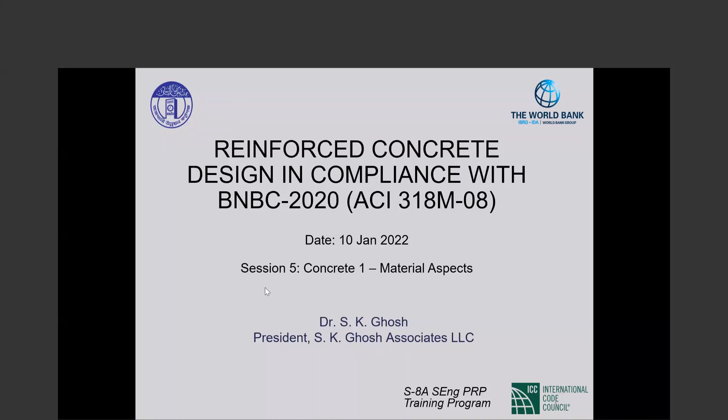Okay, good evening once again. It's 8:05, so let us start. Bodhi has already provided a bit of an introduction, so I'll just go forward. He has pointed out that the date is 11th of January, not 10th. We had to make some adjustments at the beginning of the program because of circumstances beyond our control. So today is the fifth offering in the series, and we are starting with our reinforced concrete courses. Today is a two-part course. I'll talk about the material aspects of concrete and then go on to strength design, the principles of strength design, what it is that we do when we do strength design of concrete.

The ingredients of concrete, as you all know, are cement, sand, stone, and water. Those are the basic ingredients. But for a long time now, we also have admixtures in concrete. Admixtures used to be classified as mineral admixtures and chemical admixtures. Mineral admixtures will be something like blast furnace slag or fly ash. Those are now called supplemental cementitious materials, and the chemical admixtures are called admixtures. Cement plus the supplemental cementitious materials are called just cementitious materials. So what used to be water to cement ratio today is water to cementitious materials ratio. However, the code that we are talking about, BNBC 2020, as pointed out earlier, is based on ACI 318-08. Back then, it was still water-cement ratio, and that is the terminology that you will see as we go forward.

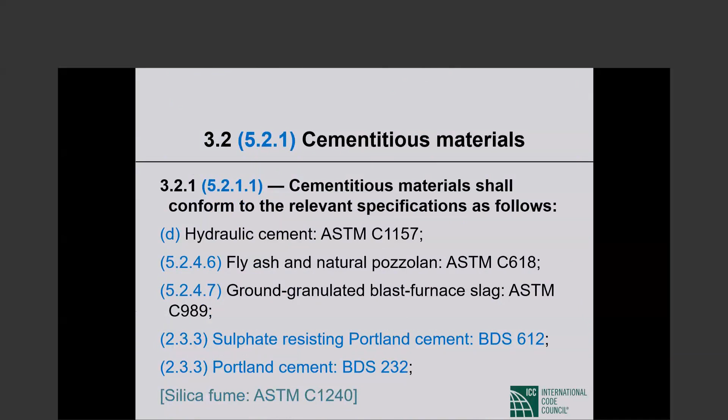So Portland cement, then blended hydraulic cement C595, hydraulic cement C1157, and the mineral admixtures, among which fly ash and natural pozzolans and ground granulated blast furnace slag - this is what we are dealing with for concrete making.

The BDS 197 cement comes theoretically in 5 varieties. CEM 1 is Portland cement, CEM 2 is Portland composite cement, CEM 3 blast furnace cement, CEM 4 pozzolanic cement, and CEM 5 composite cement, meaning cement and pozzolan together. Dr. Akif tells me that pretty much all cement used is CEM 1 and CEM 2. CEM 3 has been used in nuclear power plants, and 4 and 5 are basically not used.

C150 Portland cement is the American standard followed throughout the United States and in some parts of the world. C150 cement also comes in 5 types: type 1, 2, 3, 4, 5. Type 1 is normal, type 2 is moderate sulphate resistant - very important. If there is sulphate in the soil, you may want to go for type 2 cement. Type 3 is high early strength - I think the name tells you what it is.

Type 4 is low heat of hydration. As cement reacts chemically with water, there is heat generated, and that may cause problems depending upon what you are doing, how you are curing the concrete, and so forth. So in many applications like mass concrete, low heat of hydration may be an attraction. Then high sulfate resistance - when type 2 Portland cement doesn't do, you need type 5, cement with high sulfate resistance.

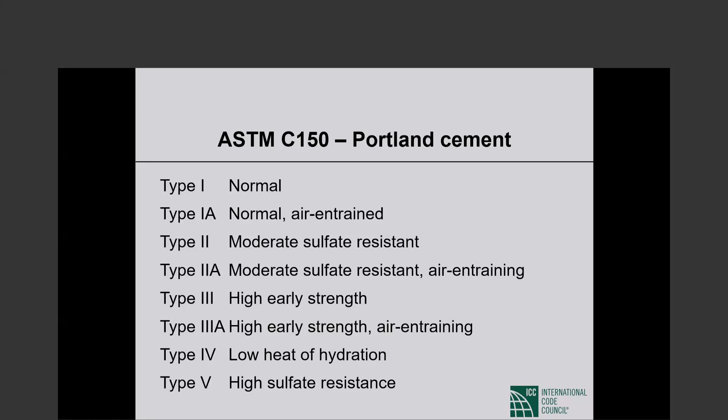For types 1, 2, and 3, there is air entrained cement. Entrainment of air in the cement is for freeze-thaw resistance. You do not have that problem in Bangladesh, but in much of the US, the entire northern part, concrete freezes and then thaws and then freezes again. That causes a lot of damage. To alleviate that damage, air is intentionally entrained in concrete. Typically this is done by adding air entraining admixtures to the concrete mix, but sometimes air is entrained in the cement itself at the cement plant, giving us type 1A, type 2A, and type 3A Portland cements. You don't have to worry about air entrainment to the best of my knowledge.

The blended cements C595: type 1S, which is Portland blast furnace slag cement, and 1P Portland pozzolan cement. If you have 1S parenthesis 50, that means the blended cement contains 50% slag by mass. And if it is a 1P cement, then within parentheses you may have A for air entraining, MS for moderate sulfate resistant, and so forth. So C595 blended cement is type 1S or 1P with additional information conveyed through the labeling.

1157 hydraulic cements, this is relatively new. C150 goes back a long way, then came 595, and then 1157 is relatively recent. This is also called performance spec, meaning the ingredients and so forth are not pinned down, but what properties the cement will deliver is emphasized. So hydraulic cement C1157 can be type GU general use, HE high early strength, MS moderate sulfate resistant, HS high sulfate resistant, MH moderate heat of hydration, LH low heat of hydration. So this kind of mirrors the varieties of C150 Portland cement that we have.

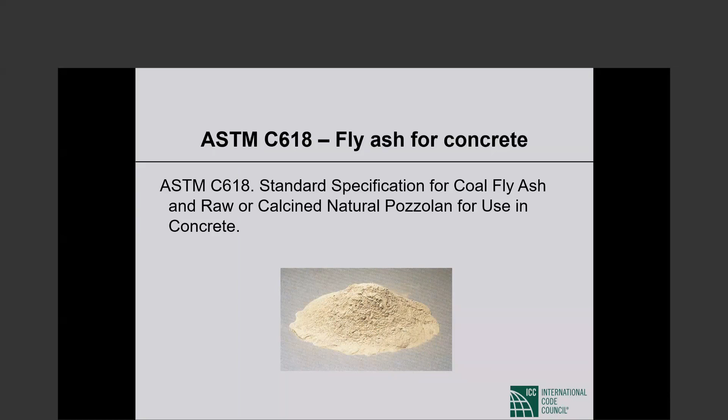Fly ash, probably the most common mineral admixture that is used in concrete. Fly ash gives the concrete a very dark color, but fly ash itself is not dark, as you see in the picture. The fly ash that you use must comply with ASTM C618, the spec for coal fly ash and raw or calcined natural pozzolan for use in concrete. So C618 for fly ash.

Ground granulated blast furnace slag, that again is a pretty popular mineral admixture or supplemental cementitious material. The applicable ASTM standard is C989, standard specification for slag cement for use in concrete and mortars.

Now, this is not citing a standard, and this is a reminder in all the slides. The section numbers in black are ACI 318-08 section numbers. The section numbers in blue are BNBC 2020 section numbers.

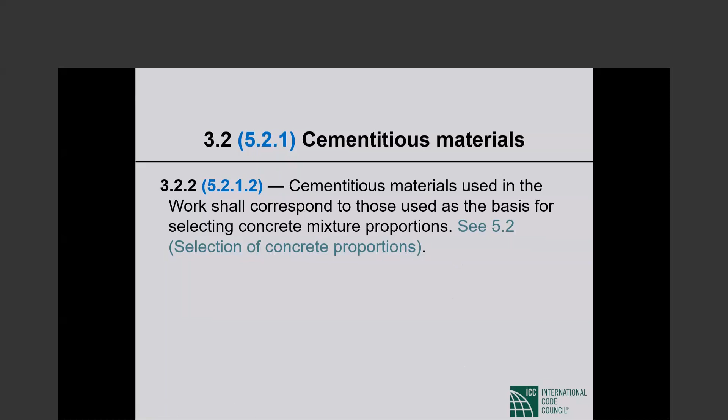Both documents tell you cementitious materials used in the work, meaning project, shall correspond to those used as the basis for selecting concrete mixture proportions. So you proportion your mix assuming that you are going to use certain supplemental cementitious materials. On the project, you have to use exactly those materials, not something close to those, etc. I think this is understandable upon reading, but this is very, very important. Whenever we have on the slide text in this color, that means it is ACI 318 text that does not appear in BNBC 2020.

We go from cement to aggregate. Concrete aggregate shall conform to one of the following specifications. BNBC 2020 says coarse and fine aggregate shall comply with BDS 243, coarse and fine aggregate from natural source for concrete. The US specification for normal weight aggregate is C33, and for lightweight aggregate it is C330. So C33 is normal weight aggregate, C330 is lightweight.

BNBC has an exception that reads aggregates that have been shown by special test or actual service to produce concrete of adequate strength and durability and approved by the building official do not have to comply with ASTM C330. In other words, you may use lightweight aggregate that is not in compliance with C330 if, as the exception says, it has been shown by special test or actual service to produce concrete of adequate strength and durability, and it has been approved by the building official.

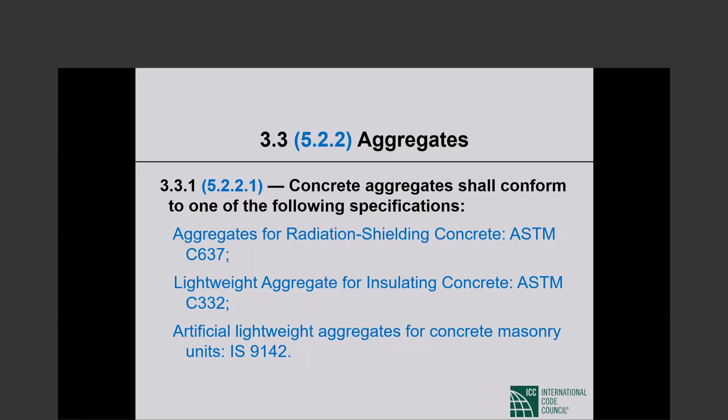I realize that this is not exciting stuff, but these things are important. All the ingredients of concrete have to comply with applicable standards and specifications.

The whole purpose of this is that concrete can be placed so that there will not be voids in the completed structural member. This is extremely important. If your stone pieces are too big, then voids may very well be created in the concrete because the concrete does not flow, it does not fill all the gaps that need to be filled. So 1/5 the narrowest dimension, etc. You can read this, this is extremely important. You cannot always use large aggregate, obviously.

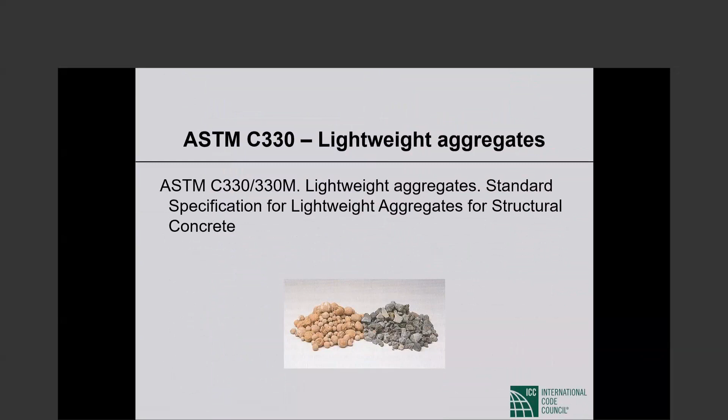C330 is the standard or specification for lightweight aggregate. The title is Standard Specification for Lightweight Aggregates for Structural Concrete.

Mixing water for concrete. Mixing water is more important than anyone would think. I would say it's extremely important that the water used in mixing concrete be non-problematic water, let me say.

We now have an ASTM C1602. It's relatively new, I haven't checked back, but I suspect that when ACI 318-08 came out, that specification was simply not available. So it is not cited in BNBC 2020.

So BNBC 2020 says mixing water for pre-stressed concrete, or for concrete that will contain aluminum embedments, includes that portion of mixing water contributed in the form of free moisture on aggregates. So free moisture on aggregates shall count as mixing water.

That is important. So mixing water shall not contain deleterious amounts of chloride ion, and how much is deleterious is given in both BNBC and ACI 318-08. For that, you have to go to section 5.5.3. Mixing water for pre-stressed concrete shall not contain deleterious amounts of chloride ion.

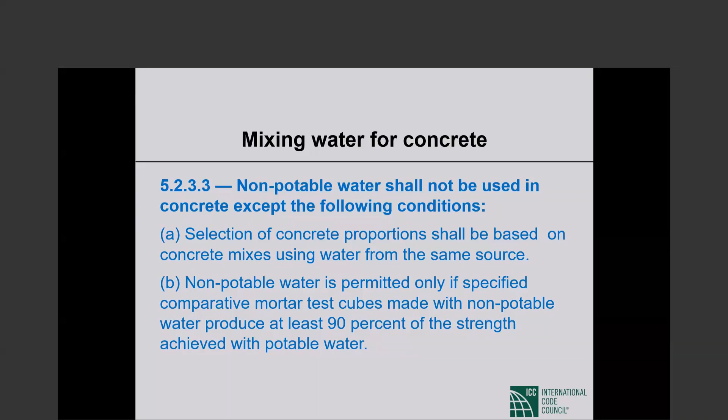Now, this is on this slide and I would emphasize it is extremely important. Item A is also important: selection of concrete proportion shall be based on concrete mixes using water from the same source.

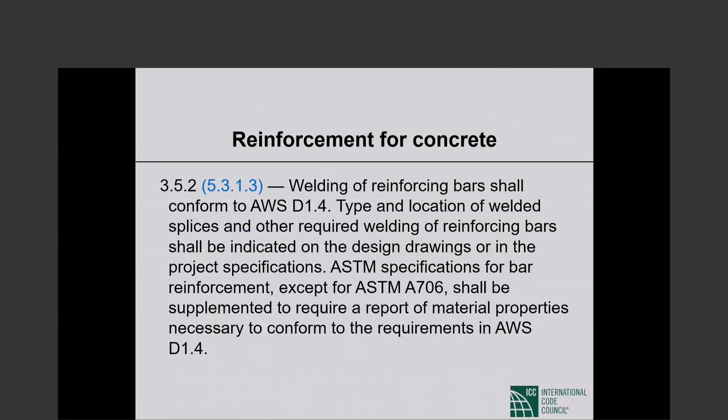Now we go on to reinforcement for concrete. The first item is not on reinforcement but welding of reinforcement. Welding of reinforcing bars shall conform to AWS, American Welding Society, D1.4. I'll let you read the rest, it gets a little too much.

Anyway, deformed reinforcement - that's what we always basically use. There used to be plain reinforcement a long time ago, but that has now been discontinued for quite a while, so all reinforcement is deformed reinforcement. The deformations are those ribs that you see on reinforcing bars. It is also called ribbed bars, the deformed bars.

So deformed reinforcing bars shall conform to the requirements for deformed bars in one of the following specifications. The specifications in Bangladesh are BDS 6935-1 and BDS 6935-2. -1 is plain bars, so those are not used. -2 are deformed bars, those are the ones used. So just as I remarked about cement, about reinforcement, basically all reinforcement used in Bangladesh, I understand, is BDS 6935-2.

Now in the US, the vast majority of reinforcement is ASTM A615, but particularly in seismic applications, and I would say increasingly, we have A706 reinforcement. The difference between the two: A706 is weldable reinforcement, A615 is not. A615 reinforcement requires special treatment if we are going to weld it. The ingredients of A706 are also tied down much more strictly than those of ASTM A615.

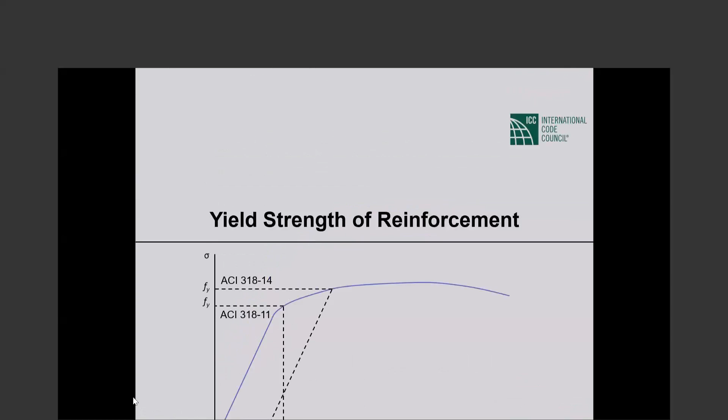So you take a strain of 0.0035 along the x-axis, and the corresponding stress is the yield strength. So when the yield strength exceeds 60 ksi, the yield strength shall be taken as the stress corresponding to a strain of 0.35%. This change of definition becomes important in certain applications and may come up in later discussions, but that is not the subject today.

However, I do want to point out that this change of definition is made. Yield strength means different things for reinforcing steel up to 60 ksi yield strength and reinforcing steel with yield strength larger than 60 ksi.

Then, in addition to bars, there are bar mats for concrete reinforcement. The applicable ASTM standard is A184. When I have M following the standard number, that simply means metric. Reinforcing bars used in bar mats shall conform to 615 or 706, the two US specs for reinforcement.

Now we go from bar to wire for reinforcement. Deformed wire for concrete reinforcement shall conform to A496. BNBC size shall not be smaller than size D4, which has a nominal diameter of 5.72 millimeters.

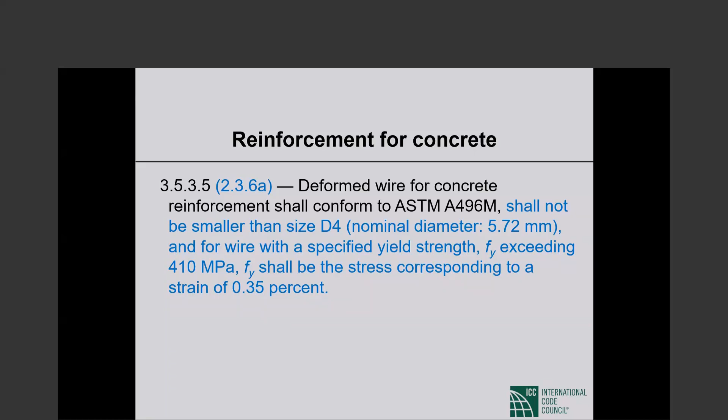Now, wire size - when we say D4, what does it mean? Individual wire size designations are based on the cross-sectional area of a given wire. M stands for metric, W represents plain wire, and D represents deformed wire. The number following the W and D represents the cross-sectional area of the wire in square millimeters.

So D4 means deformed wire having a cross-sectional area of 4 square millimeters. A D10 wire would indicate a deformed wire having a cross-sectional area of 10 square millimeters. Keep that in mind when you come across wire sizes.

Then there is what used to be called welded wire fabric. Now it is called welded wire reinforcement - people who manufacture these do not like the term fabric. Welded wire reinforcement may be made of plain wire or deformed wire.

Welded plain wire reinforcement shall conform to ASTM A185, except that for wire with high strength exceeding 60 ksi yield strength, the definition of yield strength changes. Welded intersections shall not be spaced further apart than 300 millimeters, 12 inches, in the direction of calculated stress, except for welded wire reinforcement used as stirrups. So there is a maximum spacing between the cross wires - no more than 12 inches.

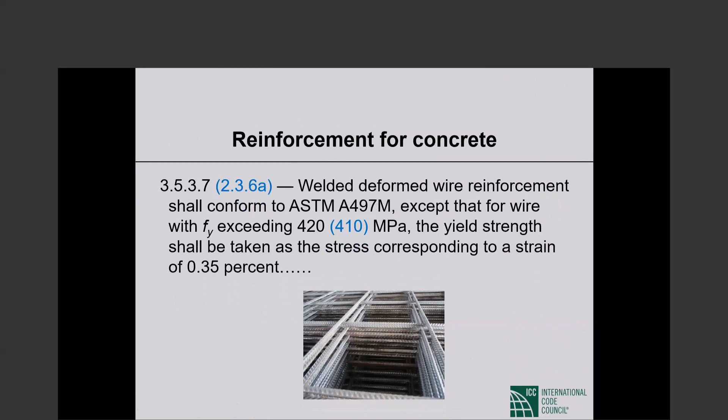Welded deformed wire reinforcement, the spec is A497. Again, the definition of yield strength changes when yield strength exceeds 60 ksi. Welded intersections shall not be spaced further apart than 400 millimeters. So if it is plain wire reinforcement, the cross wires cannot be further apart than 300 millimeters. For deformed wire, it is 400 millimeters.

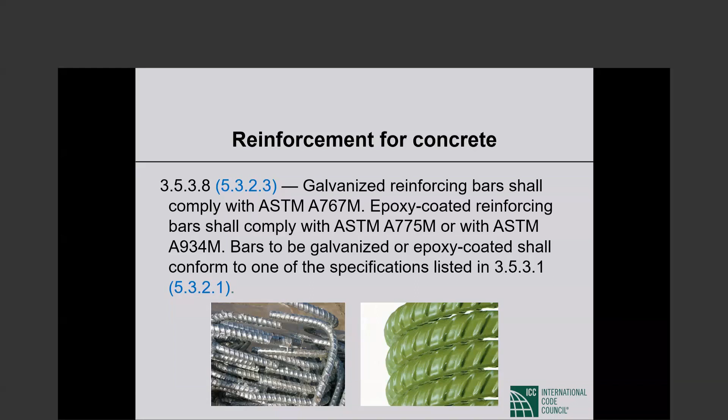Then there is galvanized reinforcing bars, A767. Galvanized means zinc coated, that is protection against corrosion, or epoxy coated reinforcement, A775. Epoxy coating, as I said, is very popular in highway construction for pavements, and in Bangladesh, apparently in coastal areas for basements and things because of the high risk of corrosion.

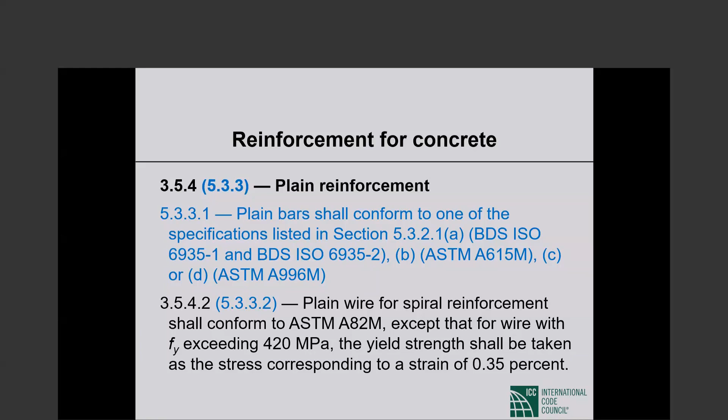Okay, so we come back to reinforcement for concrete, plain reinforcement. You know that it is 6935-1. That's the plain wire for spiral reinforcement shall conform to, so plain bars shall conform to 6935-1 as mentioned previously. Plain wire for spiral reinforcement shall conform to ASTM A82, except that for wire with F sub y exceeding - that definition of yield strength change repeats itself.

This is something I will mention because I consider it to be extremely important. At some point, I don't remember which module now, we will talk about flat plate design. Flat plate is a reinforced concrete slab supported directly on columns. There are no column line beams. Also, there is no local thickening of the slab on top of the columns - those thickenings are called drop panels. Further, there are no column capitals - the column tops are not flared to give us a larger column area at the top. So it is a slab supported directly on columns without any drop panels or column capitals.

In the design of that type of slab, the critical thing is punching shear, two-way shear as opposed to one-way shear, commonly referred to as punching shear. When punching shear stress is beyond the punching shear stress carrying capacity of the concrete, we use punching shear reinforcement, and the most popular kind are now headed studs.

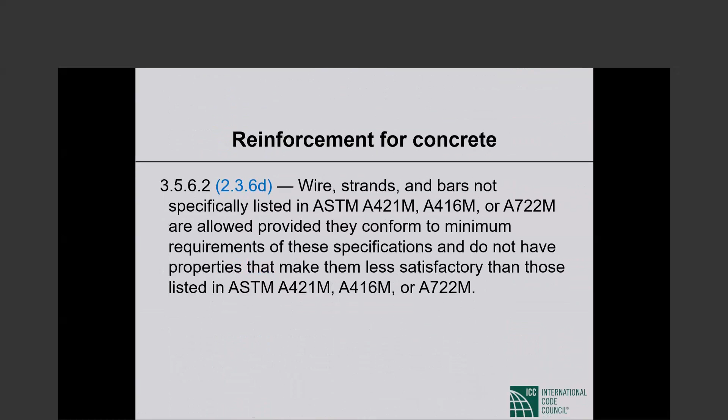Okay, then beyond reinforcing steel and pre-stressing steel, there are times when we use structural steel in concrete - steel pipes or tubing. And there are specifications given. I don't think I need to or want to take time over those. Those are not common applications, but there are times when you do use structural steel pipe and tubing in concrete. If you do, there are ASTM specs governing their use.

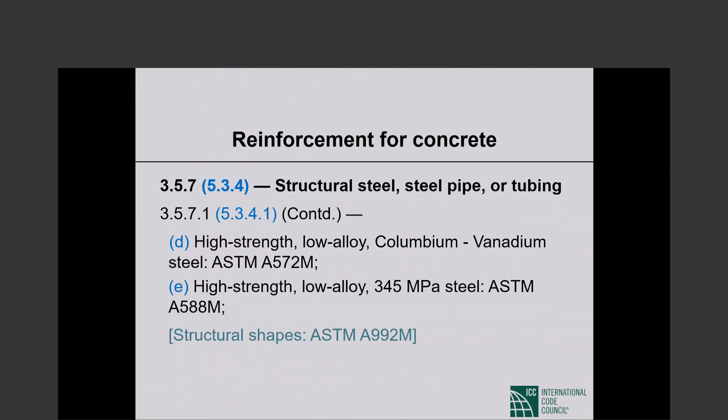Continuing with structural steel pipe or tubing - again, I don't think that I want to spend time on those items, you can look them up. I do want to spend a minute or so, as I did on the headed stud shear reinforcement. The color indicates to you that this is in ACI 318-08, not in BNBC 2020.

Steel discontinuous fiber reinforcement for concrete is recognized in ACI 318 as shear reinforcement under very tight controls. This is an increasingly important item that you should be aware of. Other types of fibers, like carbon fibers, are not recognized by 318.

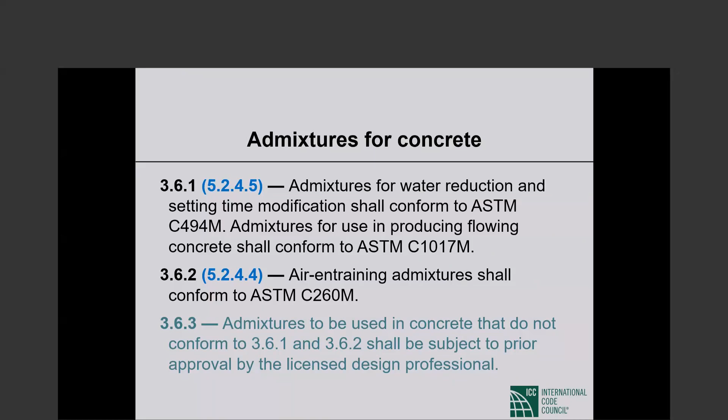Admixtures to be used in concrete shall be subject to prior approval. ACI doesn't require this, but BNBC does—admixtures must be subject to prior approval by the building official and conform to the following standards: BDS EN 934-1 or BDS EN 934-2.

Fly ash or other pozzolans are not called admixtures today—it's mineral admixture now, or supplemental cementitious material. The spec is C618. Ground granulated blast furnace slag is also cementitious material, ASTM C989. Pigment for colored concrete is C979. BNBC cites those under admixtures for concrete.

Calcium chloride for admixtures containing chloride from sources other than impurities in admixture ingredients shall not be used in prestressed concrete, in concrete containing embedded aluminum, or in concrete cast against stay-in-place galvanized steel forms. This is extremely important. Wherever you have potential corrosion, any situation where you need to ensure there will be no corrosion problem, you have to avoid calcium chloride in your admixtures.

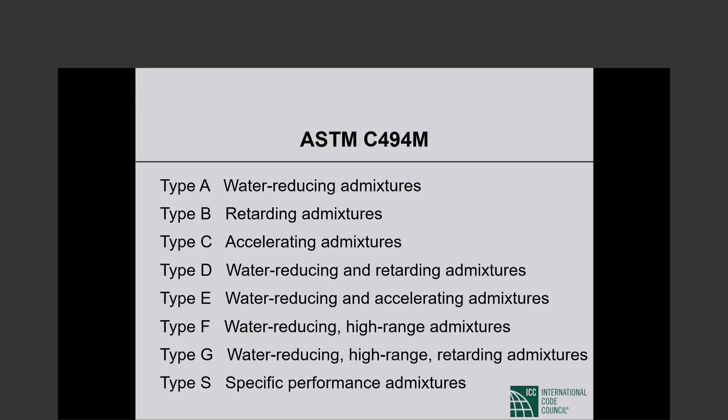High range means it gets close to what was called self-consolidating—a flowing concrete. So water reducing high range admixtures, water reducing high range retarding admixtures, and then specific performance admixtures: A, B, C, D, E, F, G, and S—various types of C494 admixtures used.

BNBC cites BDS EN 934-1, for admixtures for concrete, mortar, and grout, Part 1, common requirements. And 934-2, admixtures for concrete, mortar, and grout, Part 2, which covers concrete admixture definitions, requirements, conformity, marking, and labeling.

Storage of materials: cementitious materials and aggregates shall be stored in such a manner as to prevent deterioration or intrusion of foreign matter. Storage is extremely important. These things, when you read them, don't seem like much, but these are very, very important requirements.

Durability requirements—again, extremely important. Durability is like longevity in people: how long is your concrete going to last, going to be serviceable, going to serve the purpose for which it was installed? So, for concrete intended to have low permeability when exposed to water—so-called watertight concrete—the water cement ratio shall not exceed 0.5.

When we talk about durability, there are typically four aspects. Freeze-thaw resistance is kind of moot in Bangladesh, so you have three considerations: first, resistance to sulphate attack; second, water tightness or permeability, however you want to describe it; and third, corrosion protection.

So sulphate resistance, corrosion protection, and permeability, or lack of permeability - those are the three considerations.

BNBC starts with watertight concrete, intended to have low permeability when exposed to water. What you need to do is keep the water cement ratio - today it would be called water cementitious materials ratio, and I think that's the way you should practice it, because that makes more sense - from exceeding 0.5. That is a pretty generous number, not a very tight restriction.

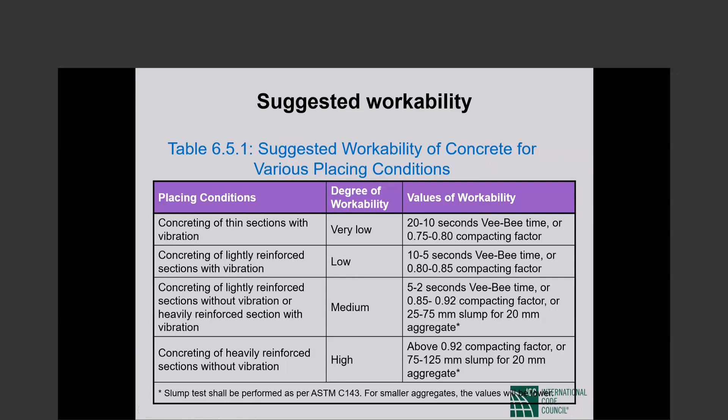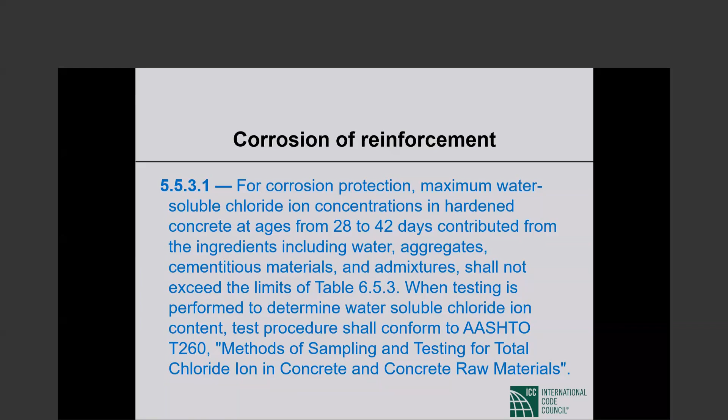When testing is performed to determine water-soluble chloride ion content, the test procedure shall conform to AASHTO T260, which I had in mind when I was talking a minute ago. When reinforced concrete will be exposed to brackish water, seawater, or spray from these sources, the requirements of sections 5511 and 5512 - the first two things I showed you for water cement ratio or concrete strength - apply, so there's a limitation on water cement ratio that we went over.

You can go back, I am not going to spend the time. There is also a minimum cover requirement in section 8178, chapter 8, which we will come to. So both are required: the limitation on water cement ratio and adequate cover on reinforcement.

So the maximum chloride ion content, as I said, there is a table giving you that. This gives you the maximum chloride ion content depending upon your application.

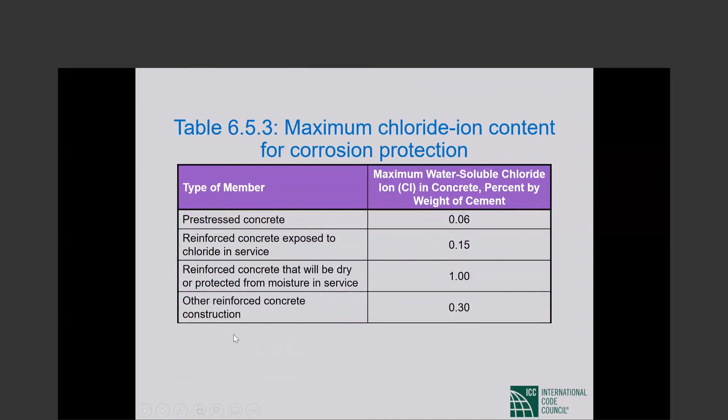The minimum concrete strength that I mentioned, for structural use of reinforced concrete - this is not particularly for corrosion protection, this is across the board. Minimum concrete strength for structural use of reinforced concrete in BNBC is 20 megapascal, Newton per square millimeter. 20 megapascal is about 3000 psi. However, for buildings up to 4-story, the minimum concrete strength may be relaxed to 17 megapascal, which is about 2500 or so. So those are the very minimum concrete strengths.

In IBC, it is 2500 psi across the board. We don't go up to the 3000 except in some cases - corrosive environments. This is important stuff for Bangladesh, this is why I kept it here.

The cover that was being referenced from earlier: if a thickness of cover for corrosive environment or other severe exposure conditions greater than the concrete cover specified is required, such greater thickness shall be specified. So there are standard cover requirements in 8171 to 8176. But if thickness of cover for corrosive environments or other severe exposure conditions greater than that is required, then such greater thickness shall be specified.

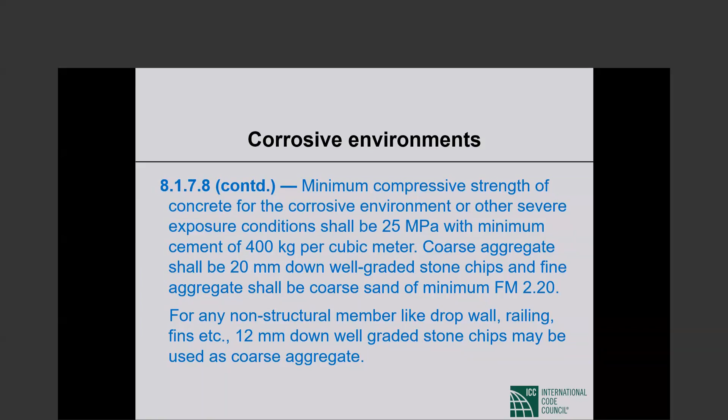I will let you read the rest of it because all the details will not register, but it is extremely important that you have these requirements on the books, and following them is in your interest. Use of brick chips as coarse aggregate is strictly prohibited for corrosive environment or other severe exposure conditions. Water cement ratio shall be 0.4 to 0.45. Potable water, drinkable water, shall be used for all concreting - that exception goes away in corrosive environments.

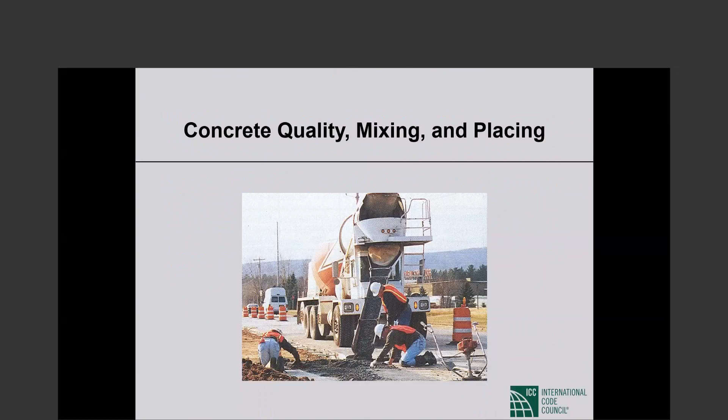Okay, concrete quality, mixing and placing. I think I'm beginning to run late, so some of this stuff probably - anyway, concrete shall be proportioned to provide an average compressive strength. So if specified compressive strength is 20 MPa, whatever, you have to set a required strength that is higher than that, and that would be F sub C R prime, R for required.

Concrete shall be produced to minimize the frequency of strength tests below F sub C prime, which is the specified value. So you will set a target value for proportioning that is higher, F sub C R prime. And the idea is that concrete shall be produced to minimize the frequency of strength tests below F sub C prime. For concrete designed and constructed in accordance with the code, F sub C prime shall not be less than 17 MPa, which we have seen before.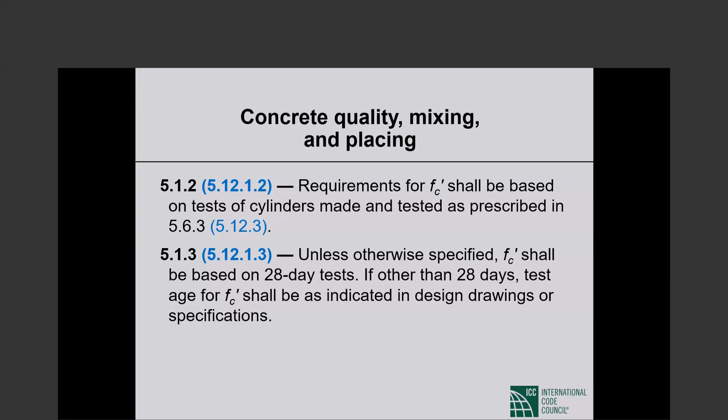The requirements for F sub C prime shall be based on tests of cylinders made and tested as prescribed, so there is a section that tells you about the cylinder size and so forth. Unless otherwise specified, F sub C prime shall be based on 28-day tests. If other than 28 days, test age for F sub C prime shall be as indicated in design drawings or specifications - that is a choice the engineer has. But if you want strength at 42 days rather than 28 days, that has to be on your drawings or specs.

So the only thing that is in BNBC carried over from 318 is: splitting tensile strength tests shall not be used as the basis for field acceptance of concrete. It has to be compressive strength, not the split tensile strength.

Proportions of materials for concrete shall be established to provide workability and consistency to permit concrete to be worked readily into forms and around reinforcement under conditions of placement, without segregation and bleeding, and to meet requirements for applicable exposure categories of chapter 4 - those are the durability requirements. So you have to comply with strength requirements, durability requirements, but also think of workability - the concrete has to be able to go where it needs to go. That is extremely important. Workability, durability considerations, and strength - all three are important in proportioning.

Where different materials are to be used for different portions of proposed work, each combination shall be evaluated. Concrete proportions shall be established. You can proportion concrete on the basis of field experience or trial mixtures or both, or you can proportion concrete without field experience or trial mixtures, and it shall meet the applicable requirements.

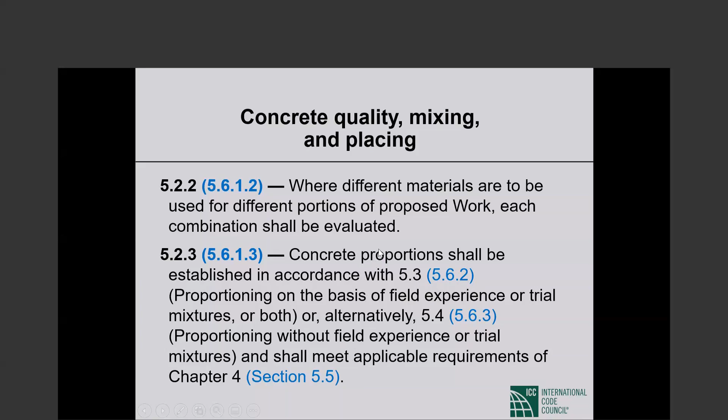Okay, so all of this stuff has now been deleted from ACI 318, but it used to be in older editions, and they are in BNBC 2020. We have deleted them from 318 because the engineer does not typically deal with proportioning - it is done at the ready-mix concrete plant. So we have stripped ACI 318 of all this stuff.

Proportioning on the basis of field experience and/or trial mixtures, proportioning by water cement ratio when you don't have the basis of field experience or trial mixtures. If you proportion by water cement ratio, then there is a strength reduction that is specified. So all those details are in BNBC 2020.

Evaluation acceptance - here we talk about testing, frequency of testing, lab cure specimens, field cure specimens, investigation of low strength test results.

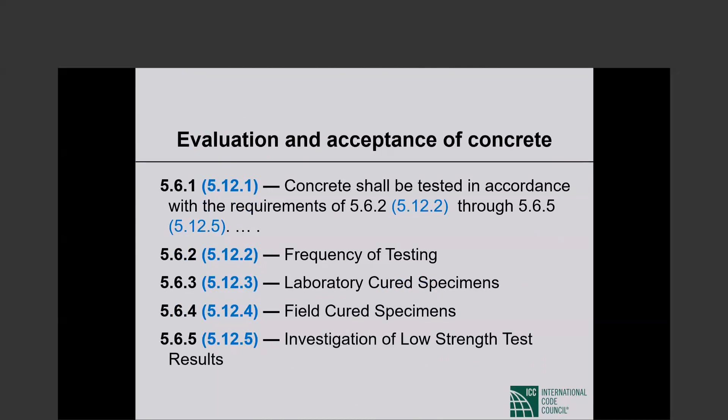And then there are major requirements concerning construction aspects, which again I will not talk about because of time limitation. But everything about concrete - if you want the right product, if you want a properly constructed concrete structure, all of these items here are important.

The mixing of the concrete, not just the proportioning, the mixing, the conveying - typically these days a truck mixer comes from the concrete plant and arrives at the job site. Then the conveying is typically through pumps in the United States. And then depositing - how do you put it in place from the head of the pump to where the concrete ultimately belongs? And then after you have placed the concrete, curing is absolutely critical.

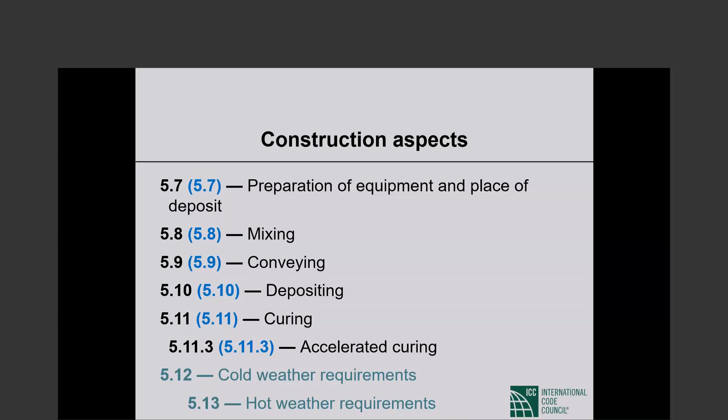There is nothing more important than curing of the concrete. You cannot let the concrete dry too quickly - that will lead to cracking and weaknesses. So these are all major topics that I do not have time to discuss, but please make sure that you understand them to be important and to follow not only the requirements in the code but also sound practice.

Formwork embedments and construction joints - there are requirements given, and this again should be taken seriously. Design of formwork, removal of forms, shores, reshoring.

Shores are the posts and things that support the forms. Reshoring is - you remove the forms when concrete has gained sufficient strength, but at that point you still have to keep the slabs supported. So you remove the shores to remove the formwork, but then you reshore - you put the post back, supporting the slab directly. Embedments in concrete, construction joints.

Okay, so that brings me to - I probably, yeah, I don't have a very good sense of the time that each segment should take, because I haven't done this before. So I have an hour and 10 minutes - it should be sufficient, I would think.

Okay, so this is now the strength design method. Two design philosophies have long been prevalent: allowable stress design and strength design. The strength design, as we call it today, was initially called ultimate strength design, and the word ultimate eventually dropped out. I don't remember from what point onwards we have called it just strength design.

So ASD, or allowable stress design, and strength design - two philosophies. Allowable stress design was the principal method used from the early 1900s, that's when we started, until the early 1960s. Even somebody of my vintage, we have really not done ASD of concrete - allowable stress design of other materials.

Steel was the next one to abandon allowable stress design - I won't be able to tell you the exact year, but it was like in the 80s in the United States. Masonry is in the process of switching now - 5 years ago it was mostly allowable stress design, some were switching to strength design. Today I think it is 85% strength design, the remaining ASD. Wood is the material where ASD is still common, and wood is a very important material here in the United States.

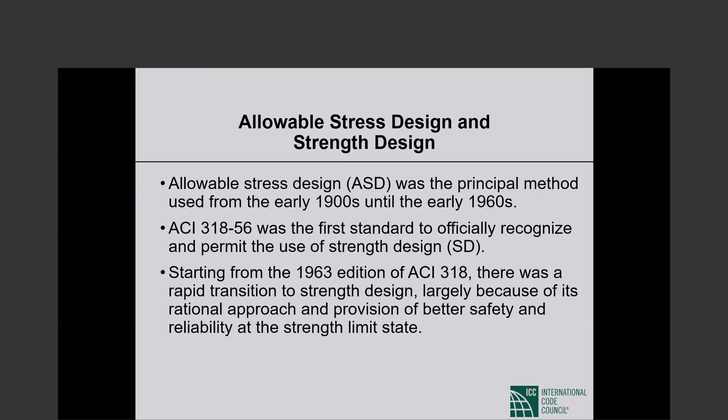1963 treated both ASD and strength design on an equal basis. In 56, strength design was introduced in an appendix. By 63, both ASD and strength design were in the main body of the code. Large portions of ASD dealing with bond, shear, diagonal tension, and combined axial load and bending were modified to reflect behavior at nominal strength.

So in 1963, and then there was 1971, it remained the same as 1963, but by 1977, the allowable stress design was moved to an appendix. Strength design was introduced in an appendix in 56. In 63 and 71, both remained side by side in the main body of the code. In 77, ASD went to an appendix, and by 2002 it was gone. The appendix with ASD was deleted from 318. That is the brief history.

So from 2002 onwards, we simply do not have allowable stress design of concrete. Strength design philosophy is very simply required strength.

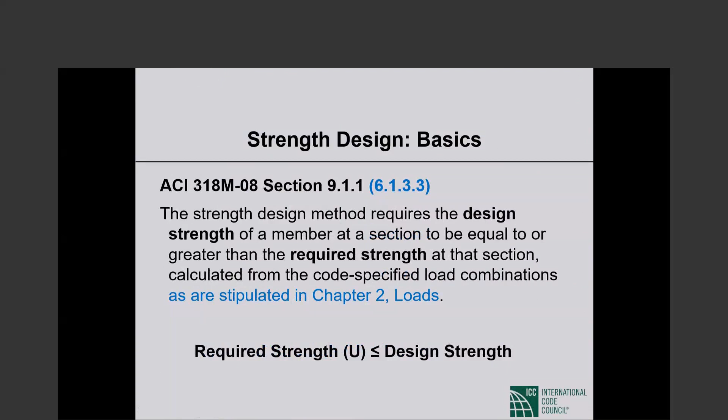What is required strength? So there are service loads. Let's start there. Service loads are the loads specified by the building code which a structure is expected to support under normal usage. There are service loads and then there are abnormal loads. We are talking about service loads specified by the building code which a structure is expected to support under normal usage. So service loads, so many pounds per square foot of live load, that would be a service load.

We go from service load to service load effect. We have a structure. If you have a structure, there are dead loads already acting, the weights of the structural members, and let us say we have live loads acting on the slabs. Now we analyze the structure elastically, and that gives us bending moments, shear forces, axial forces in the various structural members. These are internal forces caused by the external loads.

Every word I'm saying is important. Please listen very carefully. So the service loads are imposed on the structure. We analyze our structure elastically under the service loads. We calculate bending moments, shear forces, axial forces in our structural members. Those are internal forces caused by the external loads, also called load effects. So there are loads and load effects: the externally applied loads and the internal forces caused by the externally applied loads.

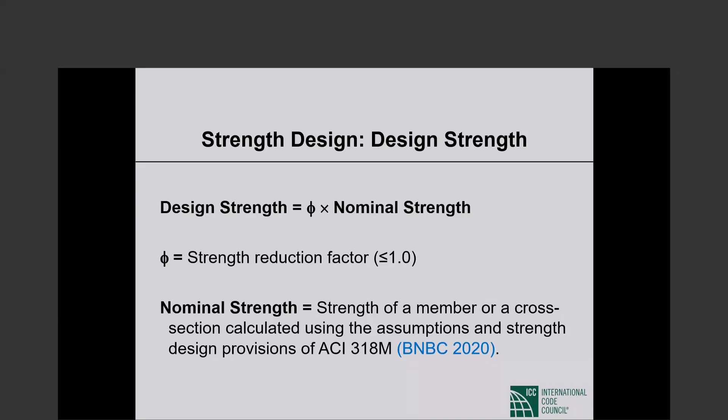That nominal strength is discounted by a strength reduction factor phi. The notation for nominal strength, if it is bending strength, is M sub n for nominal. Phi times M sub n would be design moment strength. So the design strength is a strength reduction factor times nominal strength.

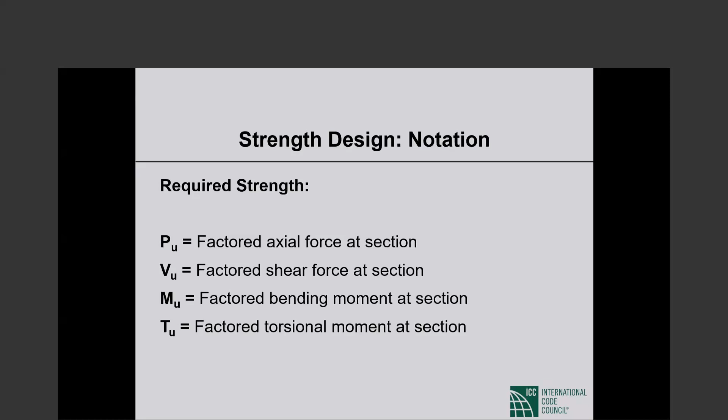Both nominal strengths and phi factors for reinforced concrete members are to be determined in accordance with BNBC 2020 or ACI 318. The required strength is always sub U. This notation is extremely important; you have to stick with those. Required strength is very different from design strength. Required strength is the demand, design strength is the supply. The demand side is sub U: required factored axial force P sub U, required shear strength V sub U, required moment strength M sub U, required torsional strength T sub U.

The supply, nominal strength times phi. The nominal strength is sub N: if it is axial load, P sub N; if it is shear, V sub N; if it's moment, M sub N; and so forth. Design strength is phi times P sub N, phi times V sub N, phi times M sub N.

Why do we apply load factors? Probable variation in specified service loads because of variation in member sizes, variation in material densities, structural and non-structural alterations, degree of accuracy in load determination. Also, uncertainties in calculation of load effects on a member.

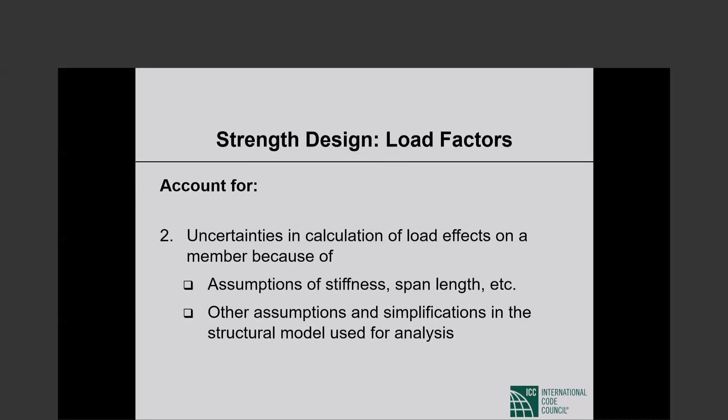We go from load to load effects by analysis. In that analysis, we have to make assumptions of stiffness, span length, etc., and other assumptions and simplifications in the structural model used for analysis. There are uncertainties involved in all of those. We assume a particular stiffness that may be different. This is why we need these load factors.

Strength reduction factors: why do we discount the nominal strength? Probable variation in material strength because of quality control, effect of testing speed. If you test something at a high speed, you get higher strength than if you test the same thing under lower speed. There's also the difference between in situ strength, in-place strength, and specimen strength. We test cylinders, which is representative of in situ strength, but it is not exactly the same. There are also stresses due to creep and shrinkage.

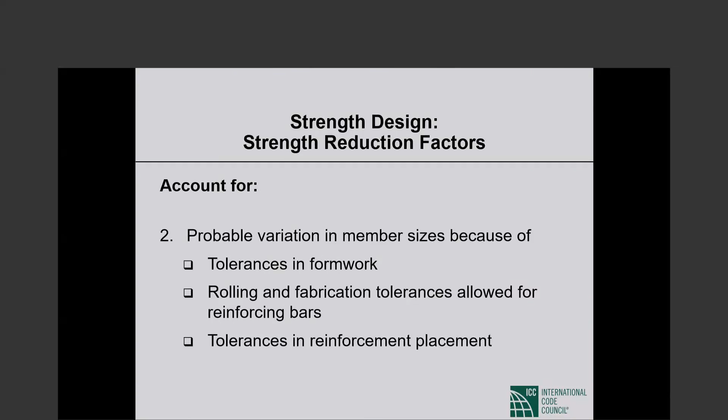Probable variation in member sizes because of tolerances in formwork, rolling and fabrication tolerances allowed for reinforcing bars, and tolerances in reinforcement placement. The strength reduction factor also accounts for various design assumptions and simplifications that cause the design behavior of structural members to deviate from the actual behavior.

And finally, consequences of failure. When a column fails, it is a catastrophe. When a beam fails, it may not be a big deal. Beams can be much more easily repaired than columns can be. So columns have to be assigned a significantly lower phi factor than beams.

So up to that point is the basic strength design that we have had since 1963. From 1956 to 1963, significant changes were made in strength design, but from 1963 onwards, details have changed, but we stayed with the same strength design basically.

But then came the unified design provisions in relatively recent times, ACI 318-95. A modified version of the strength design method was first introduced in 318-95. The whole idea was consistent design provisions for reinforced and prestressed concrete beams and columns. Prior to the introduction of unified design, there were material differences between how we treated beams versus columns and how we treated prestressed concrete versus conventionally reinforced concrete. Ideally, there should not be any difference between a beam and a column.

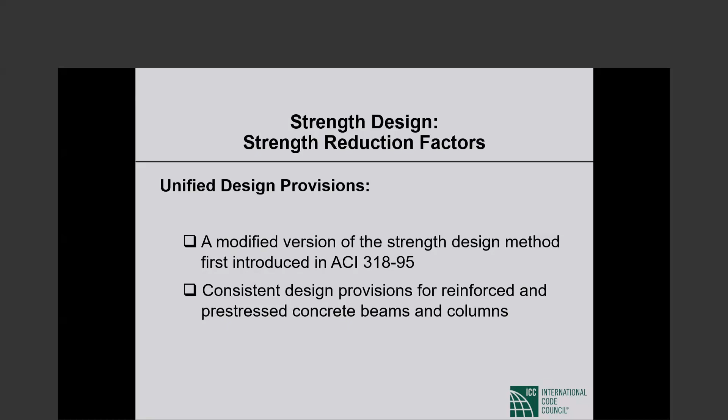Pre-stressed concrete and reinforced concrete should be viewed as two extremes of a continuum, which is partially pre-stressed concrete. You can combine reinforcing steel and pre-stressing steel in the same member, and depending upon how much of the load effect is resisted by the pre-stressing steel versus reinforcing steel, you can have behavior approaching that of a reinforced concrete member to behavior approaching that of a pre-stressed concrete member. So it should be a continuum. There should not be any fundamental difference in the way we treat reinforced concrete members versus pre-stressed concrete members.

That was the idea behind unified design. Under this unified design introduced in 318-95, the phi factor became a function of the so-called net tensile strain, a very important term now, epsilon sub t, net tensile strain. So phi is now a function of the net tensile strain epsilon sub t.

Net tensile strain is the tensile strain at nominal strength, exclusive of strains due to pre-stress, creep, shrinkage, etc. Nominal strength: something very, very fundamental to ACI 318 from the beginning of strength design has been that a section attains its nominal strength when the extreme compression fiber concrete strain reaches a value of 0.003. I will repeat.

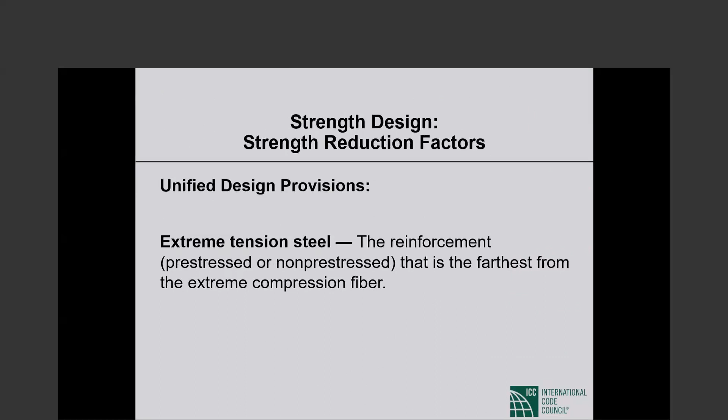Now, when I said strain in the reinforcing steel, it is actually strain in the extreme tension steel. What is extreme tension steel? The reinforcement that is the farthest from the extreme compression fiber. Very simple. So net tensile strain is the strain in the extreme tension steel corresponding to a strain of 0.003 in the extreme compression fiber of the concrete.

Why? This unified design that is in ACI 318 was the contribution, let me say, of Robert Mast, who was truly an outstanding engineer. He died relatively recently; he lived to his late 90s and was very sharp until the end. One of the smartest engineers that has been my privilege to know.

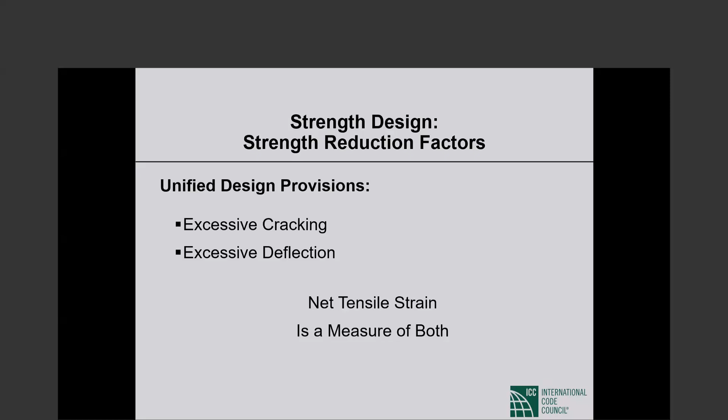This is why we limit the amount of tension reinforcement in a concrete member, to have warning of failure. The warning comes in the form of cracking and deflection. Both are related. When concrete deflects, it cracks, and when it cracks, the cracking causes the deflection. The net tensile strain is indicative of both excessive cracking and excessive deflection. This is why he thought it was a suitable quantity to anchor the whole thing on.

Now, in these unified design provisions, we talk about net tensile strain, and then we talk about compression controlled strain limit, the net tensile strain at balanced strain condition. Balanced strain condition means the reinforcement yields at precisely the same moment that concrete compression fiber reaches a strain of 0.003. So the compression control strain limit is basically the yield strain of the reinforcement.

Compression control strain limit is the net tensile strain at balanced strain conditions. Balanced strain conditions mean the steel, the extreme tension steel, yields at the same instance that the extreme compression fiber reaches a strain of 0.003.

Then we talk about compression control and tension control sections. We have talked about net tensile strain, and we have talked about compression controlled strain limit. Now we are talking about compression control section, and next you will see tension control section.

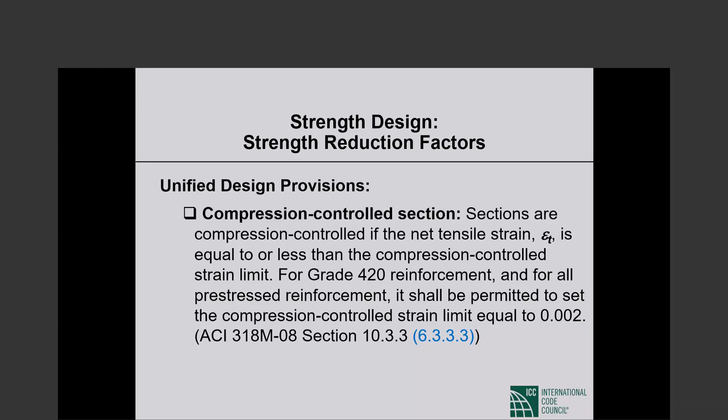For grade 420 reinforcement, that's grade 60 in our case, and for all pre-stressed reinforcement, very importantly, it shall be permitted to set the compression control strain limit equal to 0.002, the yield strain of grade 60 reinforcement. So when we talk about compression control strain limit, that limit is typically 0.002 if we are dealing with grade 60 reinforcement. That is changing these days, but for all practical purposes, in most applications, the compression control strain limit is 0.002, and a compression control section is a section where epsilon sub t, the net tensile strain, is less than or equal to 0.002.

Tension controlled section: sections are tension controlled if the net tensile strain is equal to or larger than 0.005. So 0.002 and less is compression controlled, 0.005 or more is tension controlled. Epsilon sub t is greater than or equal to 0.005.

So there are compression control sections, tension control sections, then there are transition sections. Compression control sections, net tensile strain 0.002 or less. Tension control sections, net tensile strain 0.005 or more. Transition sections are sections where epsilon sub t is between 0.002 and 0.005, as simple as that.

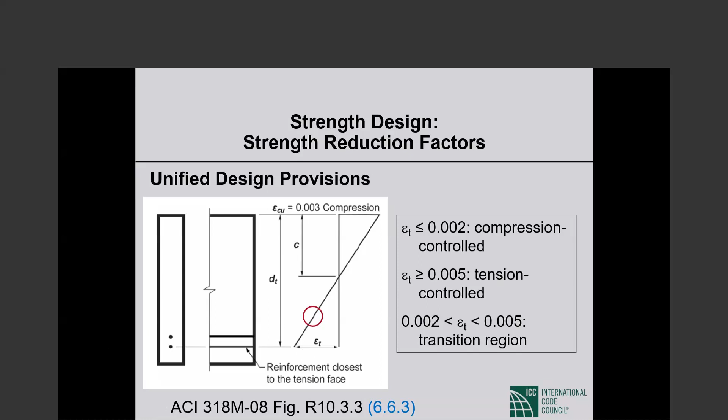So in picture, you see epsilon sub t just defined as before, the strain in the extreme tension reinforcement corresponding to a strain of 0.003 in the extreme compression fiber of the concrete. If epsilon sub t is less than or equal to 0.002, we have a compression control section. If epsilon sub t is larger than or equal to 0.005, we have a tension control section. In between, we have a transition section.

Okay, now the phi factors. Tension control sections, phi is 0.9. Notice we don't say phi of 0.9 for flexure or for beams, it is for tension control sections, 0.9. If it is a compression control section, spirally reinforced member, 0.75. If it is not spirally reinforced, the phi is 0.65. Notice again, we don't say phi of 0.75 for columns. It's compression control sections that are spirally reinforced.

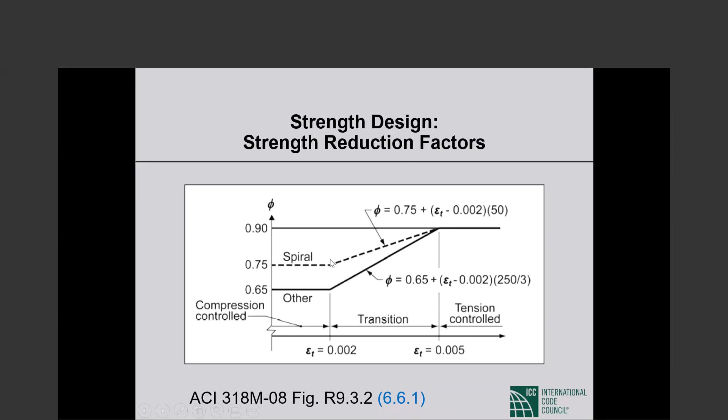In this text is better shown by this picture. So for tension control sections, epsilon sub t of 0.005 or more, phi is 0.9. For compression control sections, epsilon sub t of 0.002 or less, phi is 0.65 or 0.75. In between, for transition sections, we go on a straight line. Phi is interpolated linearly between the lower value and the higher value, 0.65 and 0.9 or 0.75 and 0.9, as simple as that. Linear interpolation between the lower value and the higher value.

Next is something that is in BNBC, not in ACI 318. It shall be permitted for compression control sections, the following optional, more conservative alternative values of strength reduction factor phi, where less controlled construction environment justifies such selection according to engineering judgment of the designer. Spirally reinforced, you use 0.7 instead of 0.75, and non-spirally reinforced, 0.6 rather than 0.65.

I think this is an unnecessary provision because you can always go lower than the code. As I emphasized, I think the very first time we met, code sets minimum requirements, you can always go above the code. So when the code says phi of 0.75, you can always use a lower phi factor as the designer. The code doesn't have to give you specific permission.

So why this lower phi value for compression control sections? Compression control sections, such as columns, are assigned lower phi factors than tension control sections such as beams because compression control sections generally have less ductility. Ductility is the ability to keep on carrying loads as you deform. Compression control sections are more sensitive to variation in concrete strength.

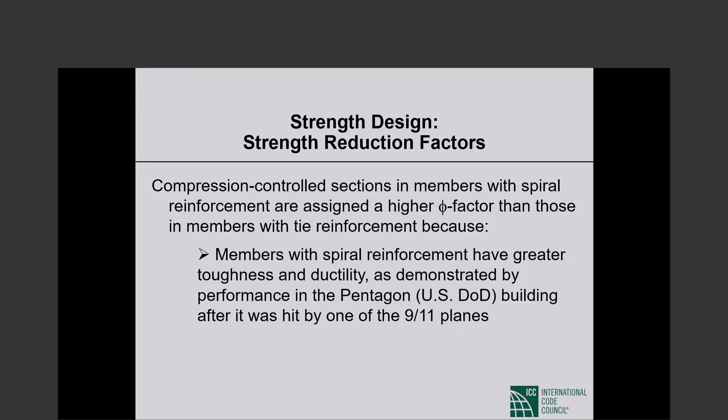This was amply demonstrated when one of the 9/11 planes hit the Pentagon in 2001. The spirally reinforced column is more ductile, more deformable than a tied column, and this is why it deserves a higher phi factor.

The other phi factors: shear and torsion 0.75, bearing on concrete, post-tension anchorage zones, strut and tie models.

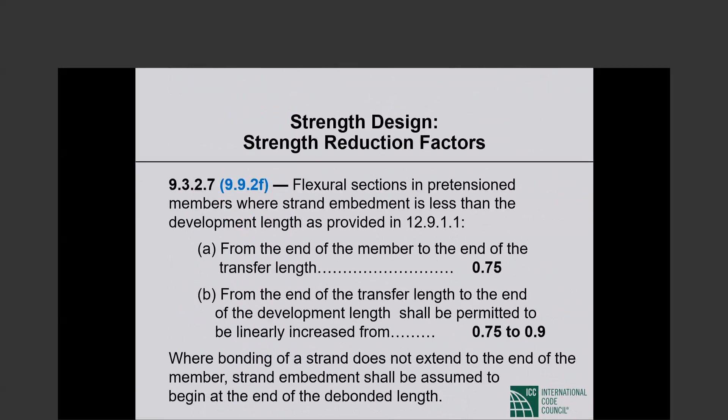It's approaching 10 o'clock, so I am not sure I want to go into this now. This is P for pre-stressed member. I will skip these two slides—if you have any interest, or a question, I'll come back. I don't have any problem, this is just to conserve a little time.

Safety margin is provided by a reduction in member strength by the phi factor, and an increase in the imposed loads by the load factor. We have both. So safety margin is the load factor divided by the strength reduction factor.

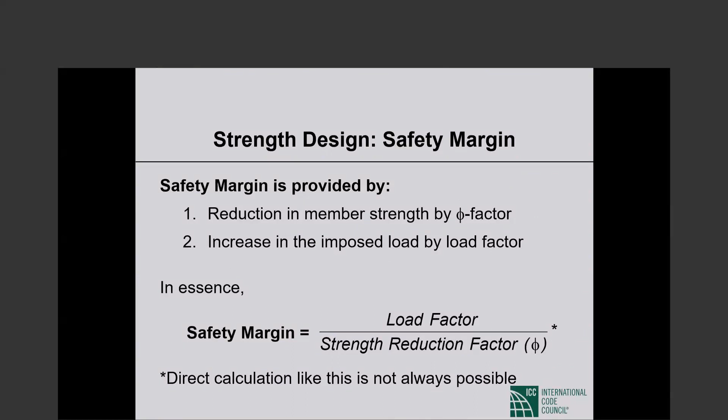Direct calculation like this is not always possible—actually it is seldom possible, but some of the time you can do that. So this is an example: design of a beam for flexural moment from dead load. That kind of simple case, you can do this kind of figuring.

M sub u has to be less than or equal to phi times M sub n. M sub u is 1.4 times the bending moment caused by dead loads. ACI 318 tells you that, BNBC tells you that 1.4 is the load factor if only dead loads are acting on your structure. Phi is 0.9 for flexure. So the safety margin in this case is 1.4 divided by 0.9, which is 1.56.

Load factors and strength reduction factors are provided after considering the probability of actual imposed loads exceeding, and member strengths falling short of, the respective design values, and the severity of failure if the above does happen.

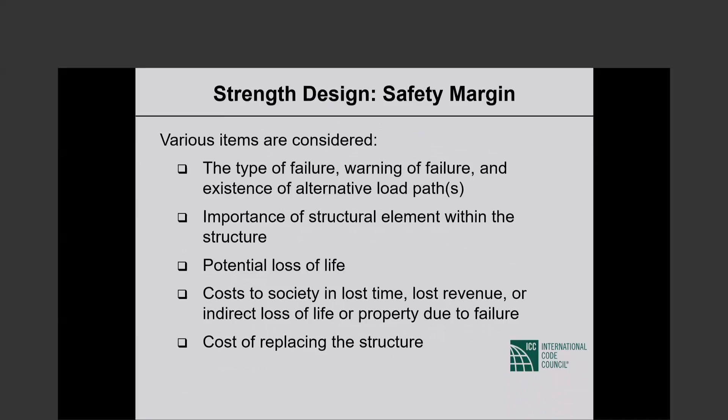There was pioneering work before we finalized the strength reduction factors, and the load factors come from ASCE 7, but even then ACI 318 used to modify them. Before we settled on the strength design basically found in ACI 318, which has been in ACI 318 since around 1971 when it settled down, it was based on pioneering work by Jim MacGregor.

In this paper, he says something I would like to throw in. The ACI design requirements are based on an underlying assumption that the probability of understrength members is roughly 1 in 100, and the probability of overload is roughly 1 in 1,000. So the probability of overload on an understrength member or structure is 1 in 100,000. Load factors were derived to achieve this probability of overload.

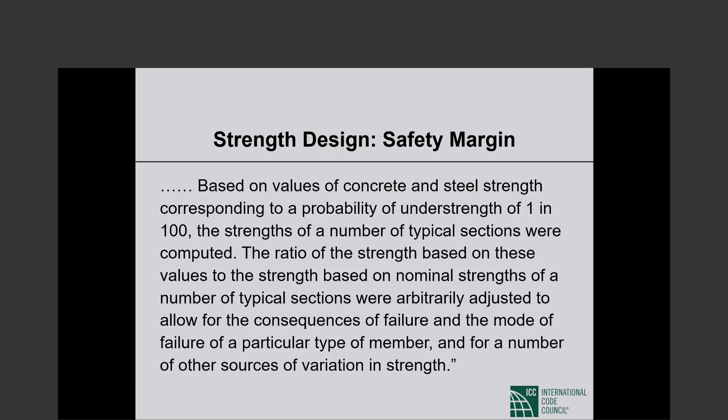So Jim MacGregor, in that pioneering paper, gives you the basis for the load factors and the phi factors used in ACI 318. The load factors are basically adopted from ASCE 7, which are also adopted by the IBC, International Building Code. You do not have multiple sources—you have the load combinations in BNBC, and I will go there.

A structural member is required to be designed for a number of combinations of the effects of various factored loads. Remember: loads, load effects, factored load effects, and then combinations of factored load effects, which is our required strength.

We have service loads, service load effects, factored load effects, and then combinations of factored load effects, which is the required strength. Strength design load combinations are provided.

Notice I did not even mention ACI 318. In the US, because the load combinations are given in the IBC, those are the load combinations you must use in design. Those are based on ASCE 7, but when a code and a standard cover the same topic, you go with the code, not the standard. In your case that problem doesn't arise. Your load combinations are in BNBC 2020 section 2.7.3. You have one place to go.

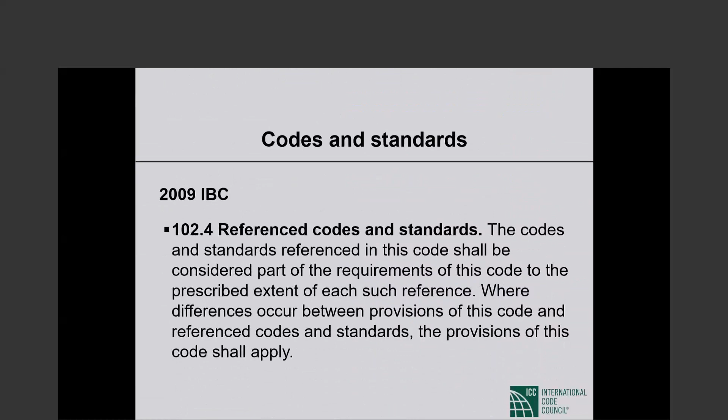Here I'm telling you that the code governs, not the standard. So these are the design load combinations of 2009 IBC and BNBC 2020 - same load combinations.

D is the effect of dead load. F is the effect of fluid pressure. T is typically called temperature effect, although that is a misnomer. So D is dead load effect, F is fluid load effect, T is effect of self-straining forces - that's a much better way of saying it. T stands for temperature, but it is the effect of restrained volume changes. That's what it is - effects of restrained volume changes, T.

L, live load effect. H, effect of lateral earth pressure, very important. L sub R, roof live load effect. R, rain load effect. W, wind load effect. E, earthquake effect. So F is fluid load effect, T is effect of restrained volume change, H is effect of lateral earth pressure, and so forth.

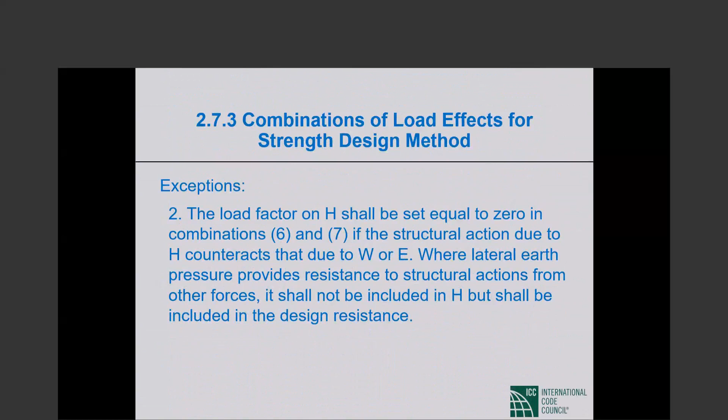Exception 3 talks about directionality of wind, and I will come to that in just a second. Okay, directionality is coming right up.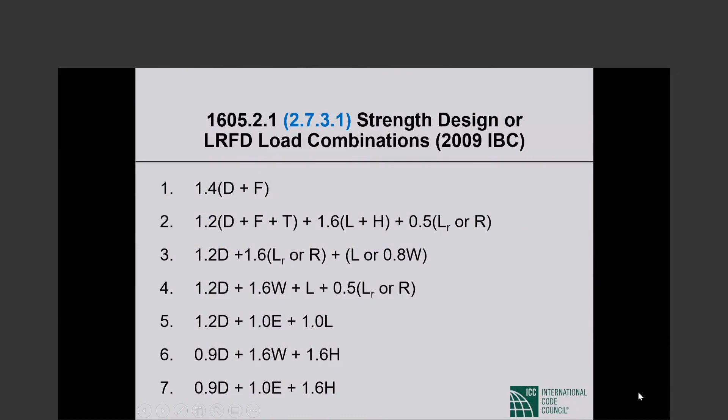Earthquake loads computed in accordance with 2009 IBC or BNBC 2020 are already at a strength level. This is why the load factor on E, earthquake effect, is 1.0 in the load combinations. If you noticed, the load factor on W, wind, is 1.6, while the load factor on E is 1.0, because E is already at a strength level.

This is BNBC, not ACI 318. When a structure is located in a flood zone or tidal surge zone, the following load combination shall be considered. In coastal zones vulnerable to tidal surges, 1.6 W shall be replaced by 1.6 W plus 2.0 F sub A, where F sub A is the effect of flood load, calculated according to BNBC 2020. In non-coastal zones, 1.6 W shall be replaced by 0.8 W plus 1.0 F sub A. These are BNBC provisions that are important for you to keep in mind.

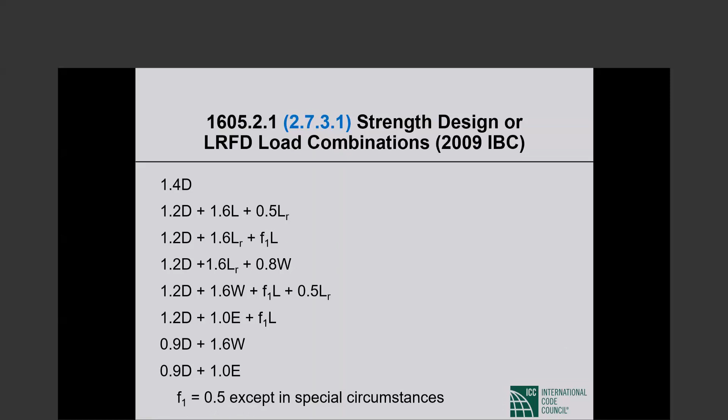For many members, the only loads considered are dead, live, wind, and earthquake. The rest go away, and the load combinations get reduced to what you see in this picture. The F sub 1 load factor on the live load is an IBC creation. F sub 1 can be 0.5 or 1.0. As I mentioned, it is 0.5 unless you are designing a parking structure, a place of public assembly, or an area supporting more than 100 pounds per square foot of live load.

In addition to the possible variability of the specified loads, values of load factors are also assigned based on the probability of simultaneous occurrence of different load types. For example, the load factor on dead load alone is 1.4, which is higher than the load factor on dead load of 1.2 when other loads such as live load, wind, etc. are also present.

Now let us talk about the directionality of wind. You have seen that the wind load factor is 1.6. It used to be 1.3 earlier. That's in the future for you, but for you, 1.6 in BNBC 2020 at one point used to be 1.3. This will be the subject in one of our seminars after we are done with concrete, when I talk about wind.

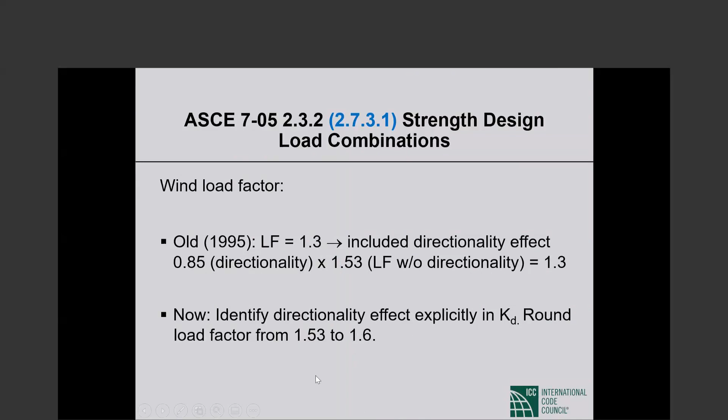But at one point, in ASCE 7 1998, ASCE introduced a separate directionality factor K sub D in the expression for wind pressure. So the wind load factor had to be increased by the same directionality factor, becoming 1.3 divided by 0.85, which gives 1.53. The 1.53, instead of being rounded down to 1.5, was rounded up to 1.6. That's the history behind 1.6.

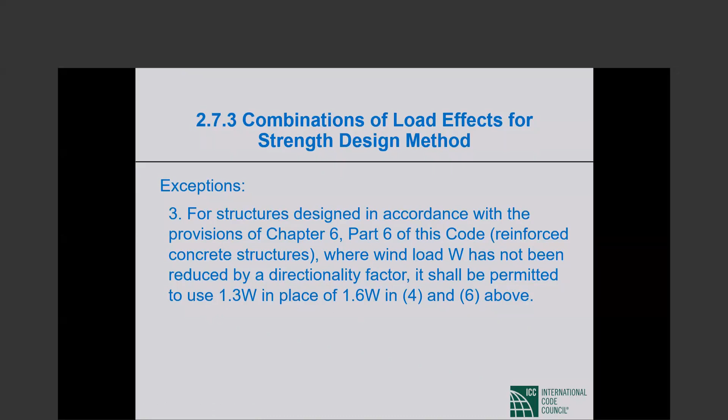And that brings us to exception number 3, which I skipped. Exception 3 says, for structures designed in accordance with the provisions of such and such, where wind load has not been reduced by a directionality factor, it shall be permitted to use 1.3 W in place of 1.6 W. If wind does not include directionality, your wind load factor should be 1.3. If wind includes directionality, which it normally would if you calculate wind by BNBC 2020, then the proper load factor on wind is 1.6.

Now the seismic load combinations: additive, 1.2 dead, 1.0 live—which would typically be 0.5 live—plus 1.0 E, and the counteractive, 0.9 dead plus 1.0 E.

Let me do it slightly differently than how the slides are. Let me present it as it's in the IBC, and then I'll take you back to BNBC.

In seismic design, we start with the design base shear V—there are seismic modules coming up on this. We distribute the V along the height of the structure in the manner prescribed by the code, giving us lateral forces at the various floor levels.

We analyze our structure elastically under those floor level forces, the IBC notation for which is capital F sub X, X for floor level X. This analysis gives us bending moments, shear forces, and axial forces at the various critical sections of structural members.

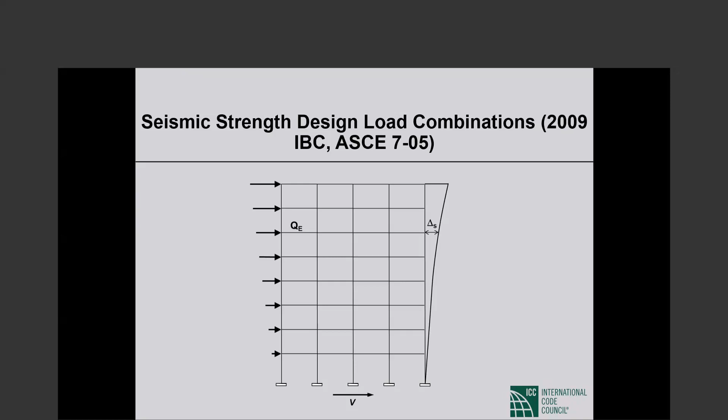The generic notation for those internal forces in the IBC is Q sub E—that's the bending moment at a beam section caused by the horizontal earthquake forces. Q sub E is also the shear at a beam section caused by horizontal earthquake forces, and it's also the axial force in a column section caused by horizontal earthquake forces.

Now, in the additive seismic load combination—1.2 dead, 0.5 live, 1.0 E—the earthquake effect E is taken as the horizontal earthquake effect Q sub E amplified by a redundancy factor rho, and then added to that is a vertical earthquake effect, taken as 0.2 S sub ds, the short period design spectral acceleration, times the design dead load.

So the earthquake effect E is the combination of horizontal and vertical earthquake effects. The horizontal earthquake effect is Q sub E multiplied by the redundancy factor rho, and the vertical earthquake effect is 0.2 times S sub ds—described in detail in our seismic modules—times the design dead load.

When we collect terms, what we get is (1.2 plus 0.2 S sub ds) times D plus rho times Q sub E plus 0.5 L. So in this additive seismic load combination, we have increased the dead load factor from 1.2 to 1.2 plus 0.2 S sub ds, considering vertically downward earthquake ground motion. If S sub ds equals 1, the dead load factor becomes 1.4 instead of 1.2.

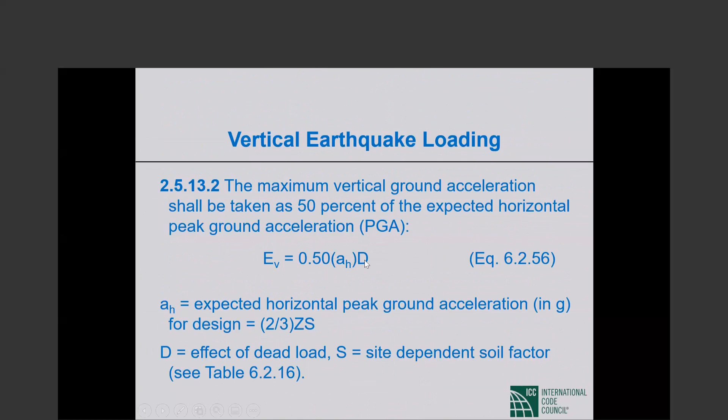BNBC exactly mirrors what is in the IBC, except that the vertical acceleration term is 0.5 times A sub H times D, which I'll explain is exactly equivalent to 0.2 S sub ds times D when I do the earthquake module with you. So what I described for the IBC is exactly the same in the BNBC: earthquake effect is a combination of horizontal and vertical earthquake effect, where the horizontal effect is rho times the code-prescribed seismic forces, and the vertical effect is 0.2 S sub ds times D.

Okay, now I'm definitely beginning to run late, but I don't have a lot more to cover. Unified design provisions were first introduced in 1995, moved to the main body in 2002. Since then, this has been the way to design concrete—the unified design provisions.

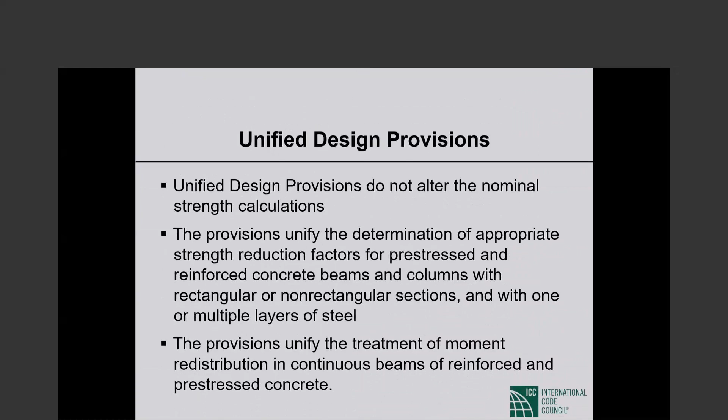318-02 is when unified design came into the main body of ACI 318. The edition before that was ACI 318-99. In the slides I'm skipping, I go back to ACI 318-99 to tell you what the problems were, how we failed to treat reinforced concrete and pre-stressed concrete beams and columns the same way, which in Bob Mast's mind was the justification for unified design. So that's what I'm skipping.

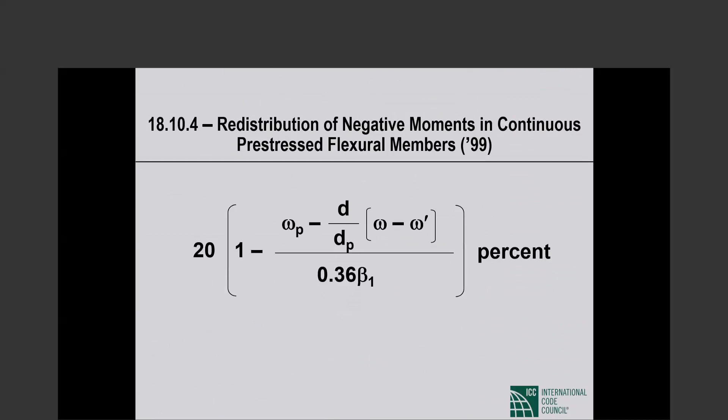For you, ACI 318-99 does not make any difference because your basis is 318-08, much later. So I keep those slides in, but there are no consequences. Two things are important.

Prior to switching to unified design, where we have tension controlled sections with epsilon sub t of 0.005 or more, compression controlled sections with epsilon sub t of 0.002 or less, and transition sections, we used to have a maximum limit on tension reinforcement, which was 3/4 of rho balanced. The balanced reinforcement ratio is the ratio that leads to yielding of the extreme tension reinforcement at precisely the same moment that the extreme compression fiber concrete reaches a strain of 0.003. So in a flexural member...

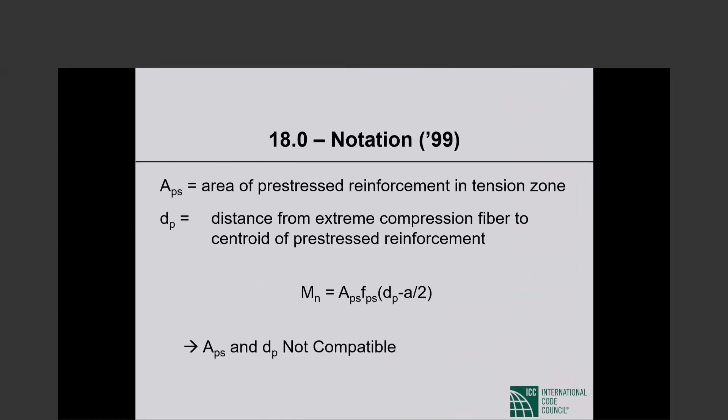So the maximum tension reinforcement ratio was 3/4 of rho balanced, and there were provisions for moment redistribution, which were quite different between pre-stressed concrete and reinforced concrete. Under unified design, we modified both, and this is what I'm coming to, what is of interest to you. This is what is in ACI 318-08, and this is what is in BNBC 2020.

So we are now talking about redistribution of bending moments. It applies equally to both non-pre-stressed and pre-stressed sections. The moment redistribution now is based on net tensile strain, epsilon sub t. The percent redistribution you are allowed is 1000 times epsilon sub t. It does not matter, reinforced or pre-stressed, your moment redistribution allowed is no more than 1000 epsilon sub t. And you cannot take any moment redistribution unless your epsilon sub t is at least 0.0075. That's what we say here.

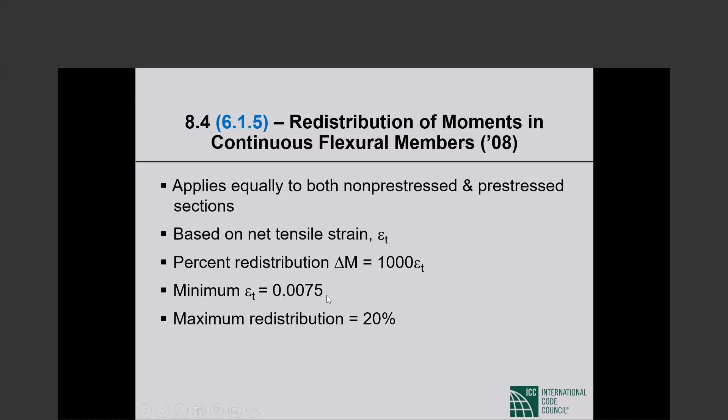Maximum redistribution you can take, irrespective of the value of epsilon sub t, is 20%. So the redistribution allowed is 1000 epsilon sub t. You cannot take any redistribution unless epsilon sub t is at least 0.0075, and the maximum you can take is 20%.

Moment redistribution means you can decrease the negative moment by delta m, in which case the positive moment will increase. But unlike in older times, we are also allowed to decrease the positive moment by the same delta sub m, in which case we'll end up with more negative moment. It depends on the situation you are facing. If you want to decrease the negative moment, you take redistribution on the negative moment. If you want to decrease the span moment, you decrease the span moment and the negative moment will go up. Both are allowed.

Moment redistribution may not be used for slab systems designed by the direct design method. There are two ways of designing two-way slabs: direct design method and equivalent frame method. If you're using the direct design method, then there is no moment redistribution.

So now, for moment redistribution, net tensile strain has to be at least 0.0075. As soon as it is 0.0075, we can take 7.5% moment redistribution, 1000 times 0.0075. We can go up to 20% for a net tensile strain of 0.02, and it remains there. We cannot go any higher.

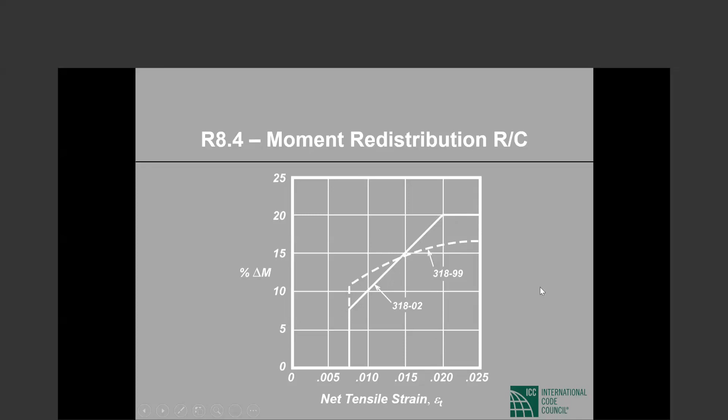This used to be ACI 318-99 moment redistribution for reinforced as opposed to pre-stressed beams. For pre-stressed beams, now there is no difference. The moment redistribution is, as I described, 7.5% at 0.0075, going up to 20% at 0.02. But the moment redistribution of 318-99 was as shown here.

So that is moment redistribution. Now the maximum reinforcement—this is the last topic. Remember, we could not go beyond 3/4 of rho balanced.

Now we say for flexural members with P sub U, required axial load, less than 1/10 F sub C prime A sub G, required axial strength less than 1/10 F sub C prime A sub G, net tensile strain shall not be any less than 0.004. Tension controlled sections start at 0.005. We are not saying all flexural members have to be tension controlled, but we are saying the net tensile strain cannot be any less than 0.004. This is extremely important.

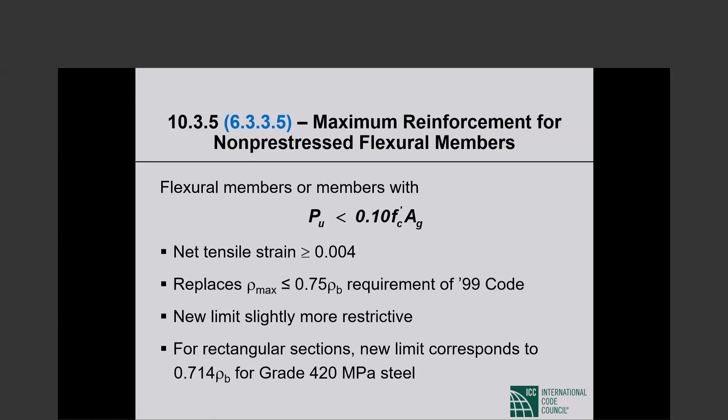This takes the place of rho maximum shall not exceed 3/4 of rho balanced. It replaces rho maximum less than or equal to 3/4 of rho balanced that we used to require from the beginning of strength design. The new limit is slightly more restrictive. For rectangular sections, the new limit corresponds to 0.714 rho balanced rather than 75% of rho balanced for grade 420 reinforcement.

Okay, and that's about as far as I need to go. Pre-stressed, I will not worry about. So it's not too bad. 10:30 was the target, it's 10:34 or so, I have time for questions.

So the first half was the material provisions, the second half strength design, and then I went to the unified design that is currently in the code, starting with 318-02. That definitely is what you have in BNBC 2020. And the last two things I talked about, moment redistribution—I don't know if it's terribly important, because it's becoming increasingly uncommon to take moment redistribution—but the net tensile strain cannot be any less than 0.004 is vitally important in the strength design we do these days.

Now, starting with ACI 318-19, we have said all beams shall be tension controlled, but for you that is in the future, probably in the far future, so I will not go there. For a long time to come, your practice will have to be: net tensile strain shall not be any lower than 0.004. Okay, thank you very much.